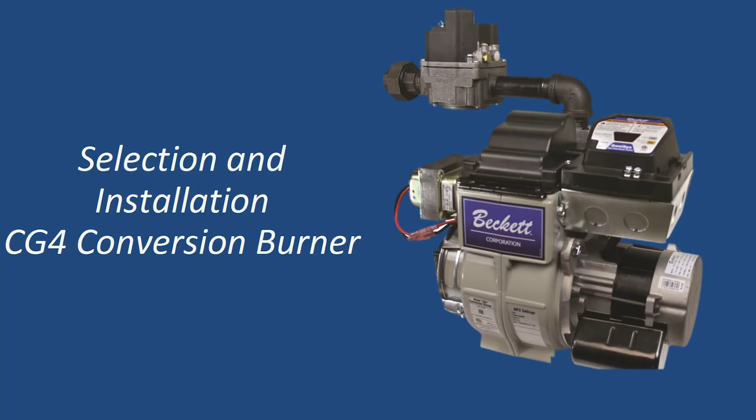In this video, you will learn how to select, assemble, and set up a Beckett CG4 gas conversion burner. This video does not replace the installation manual that comes with the burner. Please read the manual and pay special attention to the warnings and cautions included in the manual.

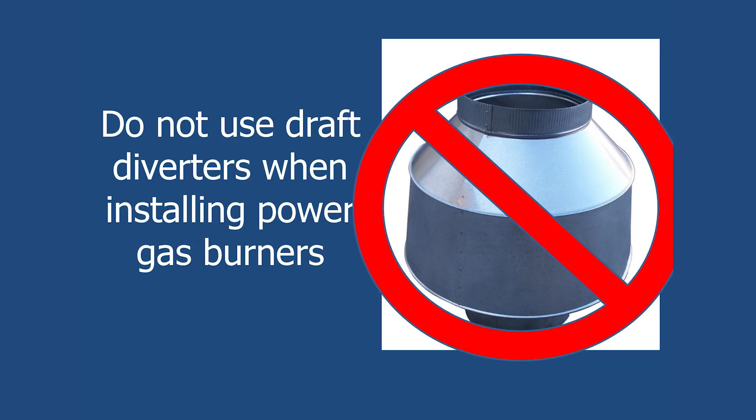Carbon monoxide poisoning is a real danger when installing gas equipment. Always obey national and local codes for venting combustion gases safely. Always use a double-acting draft regulator and block vent switch when installing power gas burners, as shown in this photo. Never use draft diverters when installing power gas burners.

Before selecting and assembling the CG4 burner, you will need to refer to the CG4 appliance guide to select the correct burner and air tube combination. The CG4 appliance guide can be located on the CG4 page of our website. Go to beckettcorp.com, click on Products, click on Residential Burners, click on CG4.

You will also need to refer to the CG4 appliance guide when assembling the burner to select the correct orifice, low fire rate baffle, air settings, and air band. Following the CG4 appliance guide should provide a trouble-free startup and make fine-tuning with your combustion analyzer simpler.

Beckett's Guide to Power Gas Burners is also available on the CG4 page of our website in PDF form. This guide will help you to size piping correctly and shows all parameters for installing power gas burners.

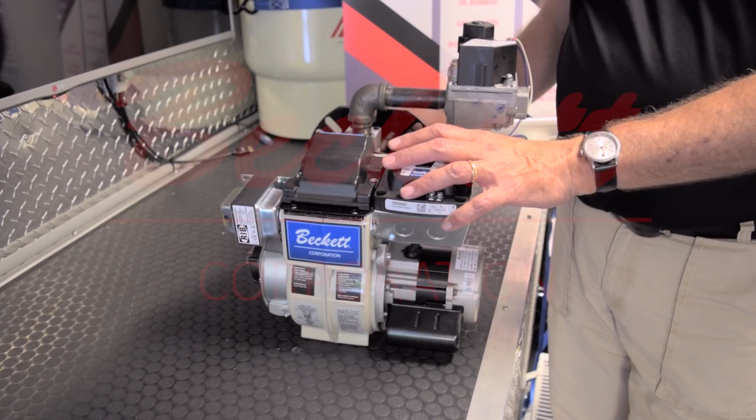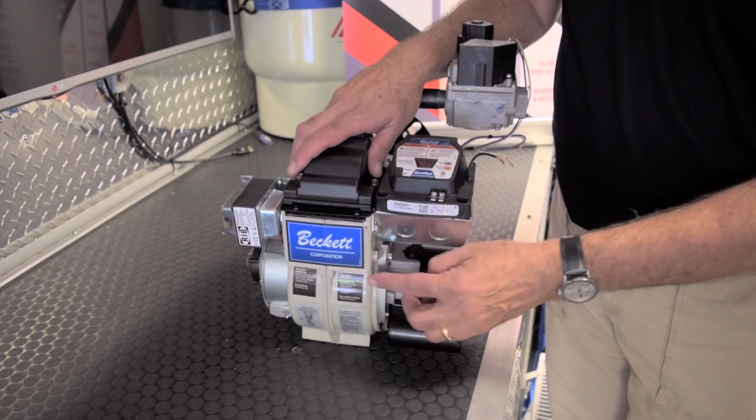I'm Jim Todd from R.W. Beckett, and this is Beckett's newest conversion gas burner for residential applications. This is the CG4. The CG4 looks familiar to you if you've ever worked on any of our oil burners because it's built on an oil burner chassis. This is the AFG chassis, AFG motor. There's an AFG fan inside, and we actually use an F head that you're all familiar with.

The burner is set up so that it is very simple for you to service and install. Part of that simplicity comes from flame rod rectification, direct spark ignition, a nozzle that delivers the gas into the air in front of the head so that you have a nice complete mix. There is also an Inconel shroud around the head itself to improve combustion for you.

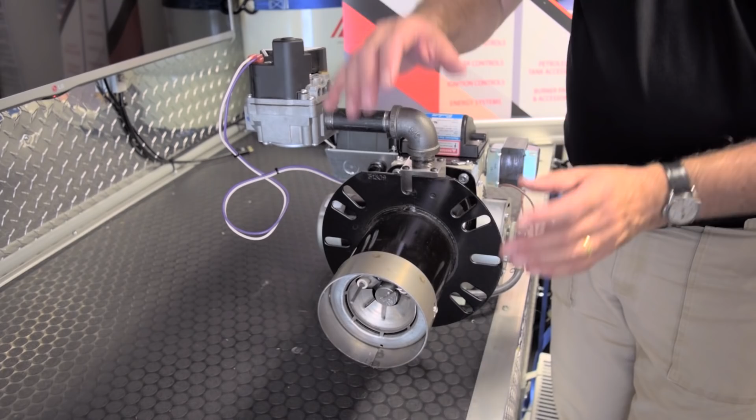The burner is sold with a welded flange for the appropriate appliance that you are going to install it to. You will refer to our installation manual for setup and troubleshooting. However, to pick out your parts, you will go to our website and look at our approved appliance list and get the air tube that is appropriate for your appliance.

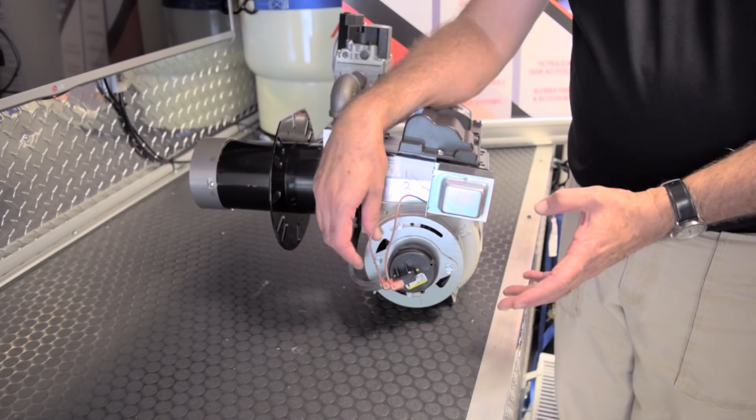The burner is shipped complete with an air proving switch that proves the air going in and the air going out to make certain that the fan is turning properly and that we don't have a blocked combustion air. If you run into a situation where you want to have direct combustion air, you can look at some of the oil accessories available from Field or other manufacturers that will fit right on the AFG.

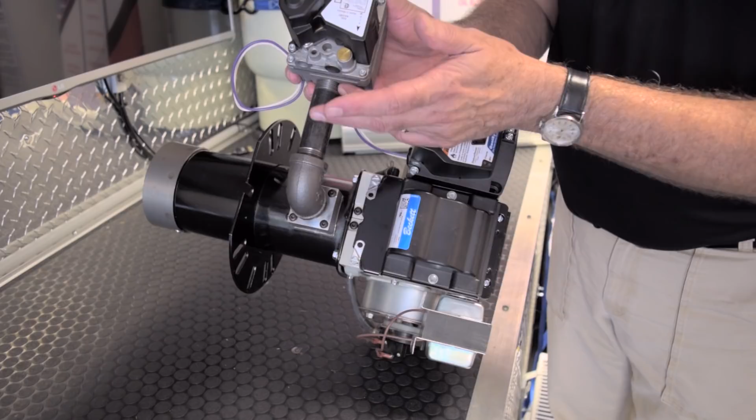The 24-volt transformer that you see here is a post-mounted transformer that is only there to provide 24 volts for the gas valve. If the transformer should go, it is an easy transformer for you to find at any supply house. Same holds true with our gas valve. The gas valve that we're using is from White Rodgers. It is 24 volts, is very simple to install, and if you need to replace it, you'll find most wholesalers around will have that available to you.

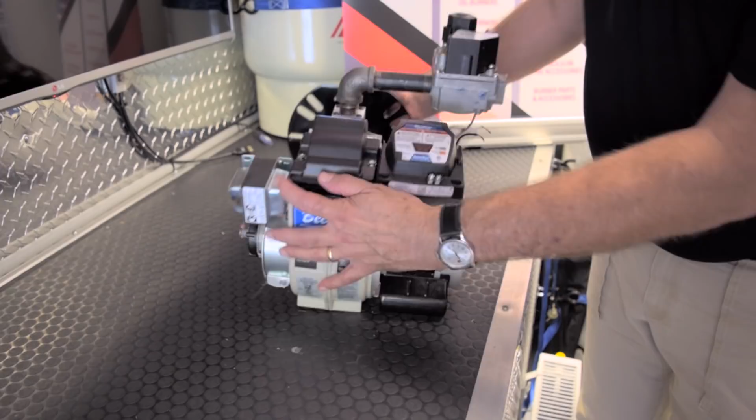The burner itself has a single pole direct current igniter on it that is manufactured by Beckett, and also the Beckett GeniSys for gas. This is the 7590. The 7590 will do all of the troubleshooting that you need just with the 3 LEDs that are on it.

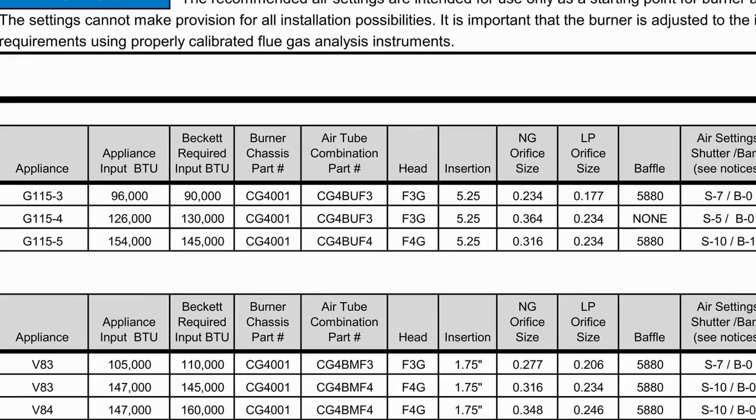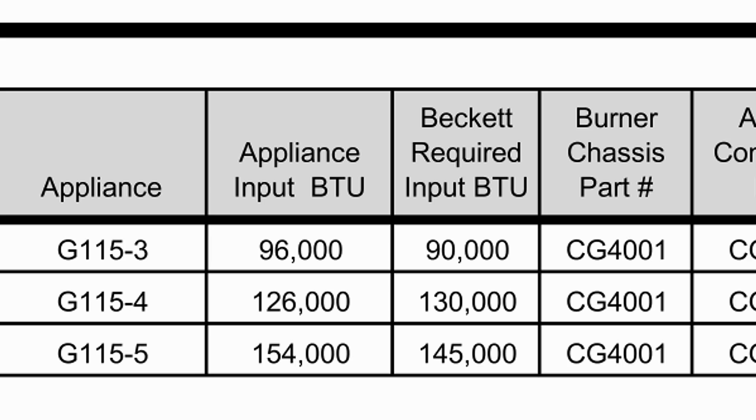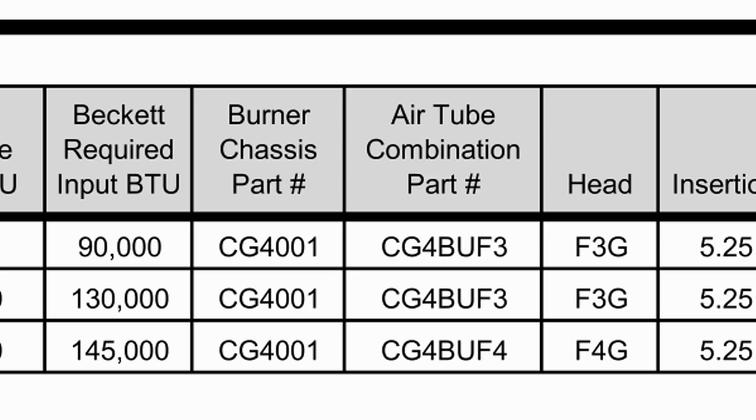Okay, folks. So we've looked up our boiler. The boiler we're working on today is going to be fired on propane. It is a G115/3. We've gone to the Beckett website, to the approved appliance list, and we are looking up a G115. Chassis is a CG4 001. The air tube combination is CG4 BUF3, which has an F3G head on it.

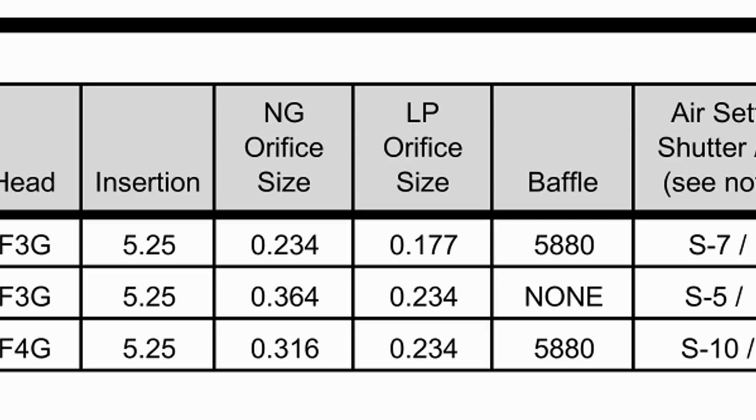So the orifice that we're going to use today is for an LP application, which is a 0.177 orifice, which will be found in the bag. The bag will have both natural gas and LP orifices in it. We do not have to respring the gas valve. We just have to change the orifice.

The burner and air tube boxes have arrived from the distributor. Let's open them to see what is provided. So now we'll uncrate the burner chassis box, and then I'll uncrate the air tube assembly.

When you open up the burner chassis box, the first thing that you will find is a package with the instructions in it. In the instructions, you will also find the hang tags for service that we will reference afterwards, and all of the instructions that we need for the control, serviceman's information on the pieces and parts, labels so that we can relabel the boiler indicating what's going on for propane.

This is the hang tag, and the I&O manual. In the back of the I&O manual is a startup sheet that we will refer to later on, but this sheet must be completed when you're doing your conversion.

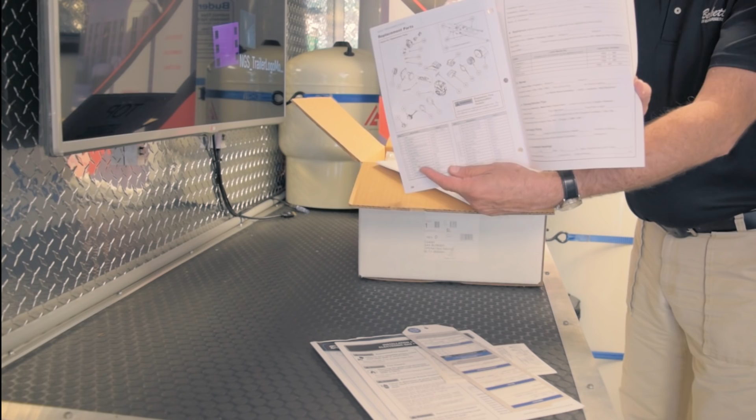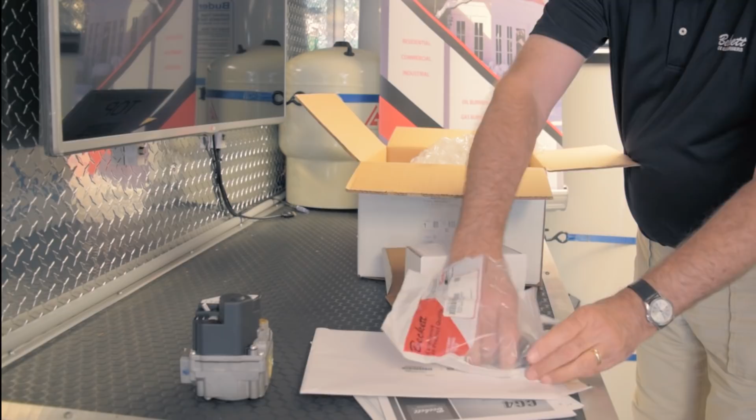The other components in the box are the White Rodgers 24-volt gas valve, a low fire baffle, and some fittings, including a union and a T with a test port in it so that we can test the incoming gas pressure.

And you'll put that into your line. And here's your union so you can break it apart for service. And the low fire baffle, which we are going to use on this application. Then we have the chassis.

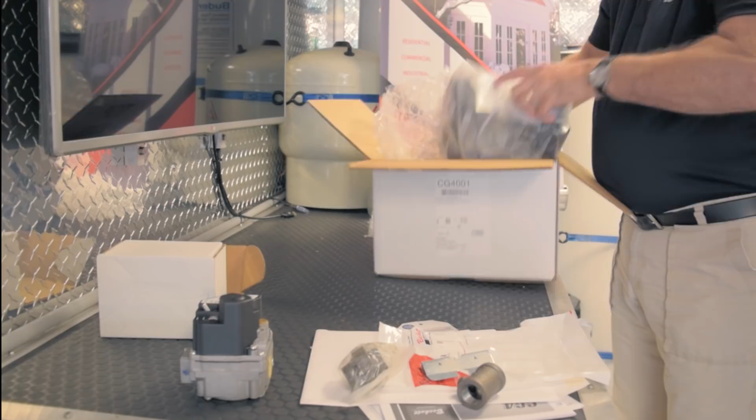The chassis is complete with a 24-volt transformer to power the gas valve, my ignition module, my igniter, which is 32,000 volts direct current, single pole, and my GeniSys 7590 control. The wires that you see here are for your gas valve. White is your common, purple is going to go to your main valve.

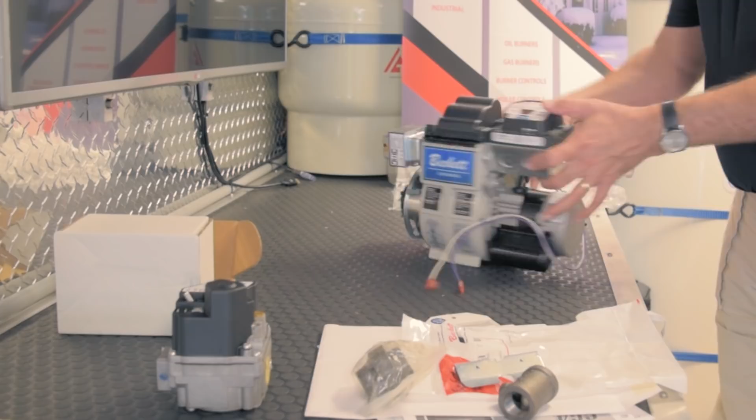The other components on the burner itself are the air proving switch, which tests air coming in and checks for air going out so that we are certain of that. Okay, now we're going to open up the air tube assembly. The air tube assembly is going to have some more components in it as well as the air tube assembly itself.

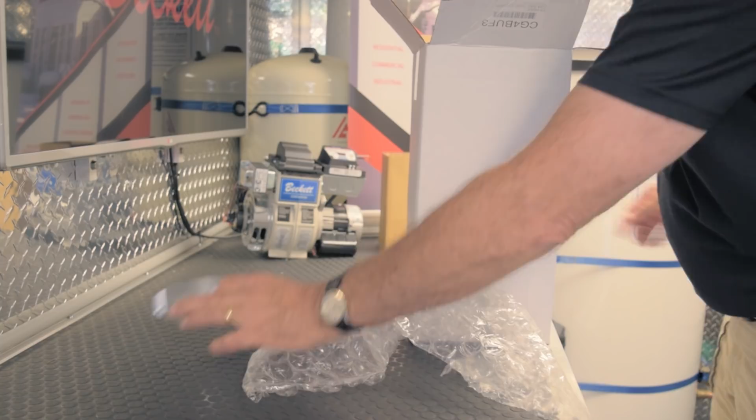Part of this assembly is we're going with a lower firing rate, so we need to use a blank band on the burner itself. This is the blank band. We will install that later on. The other box that you'll find in here as we go along is the box that has got the connection for the gas train assembly.

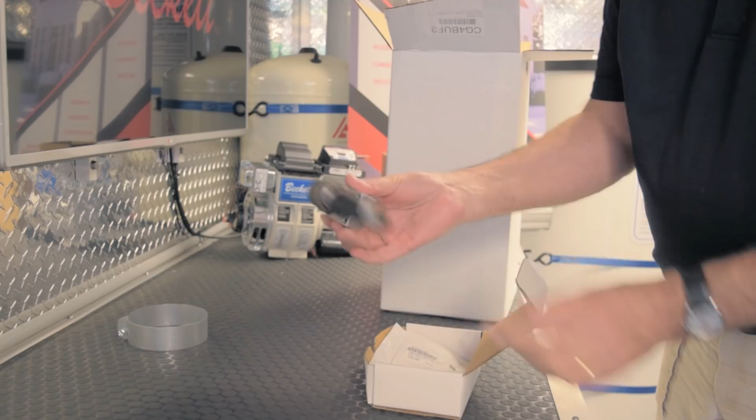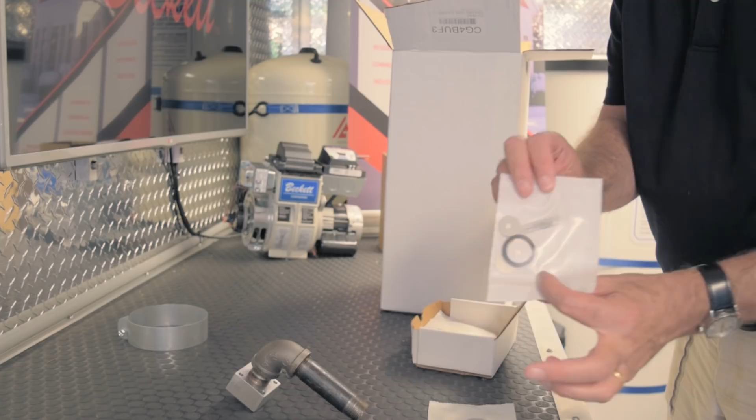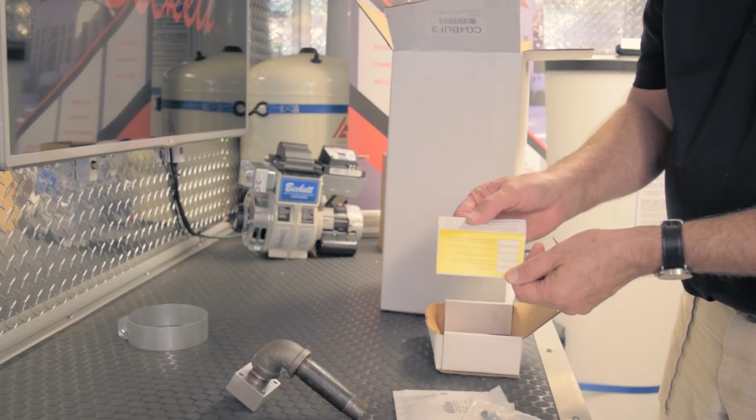Here is our block. That's going to go on the gas train assembly. We have our natural gas orifice pack. We have our LP gas orifice pack. And then we have the small screws that we're going to use to put the burner together. Additionally, there are instructions and another label so that we can label the boiler accordingly.

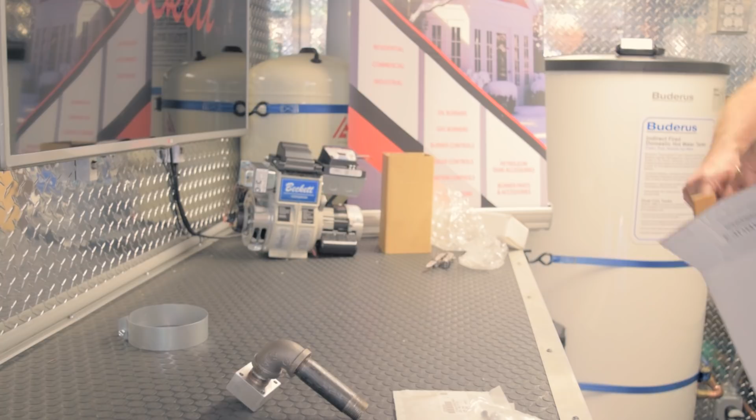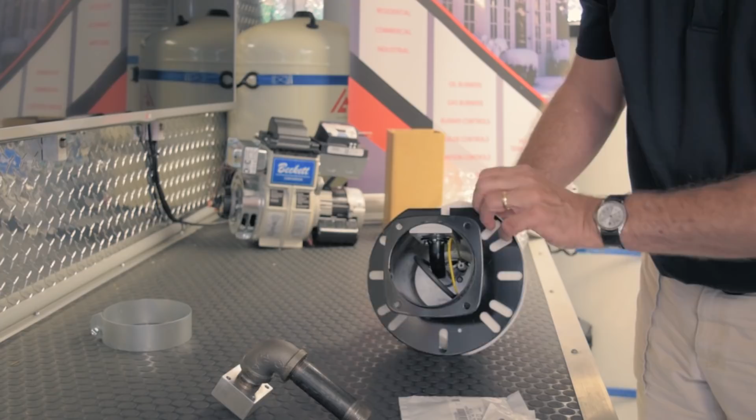Then we'll pull the burner air tube assembly out. The air tube assembly is set up with the appropriate insertion depth for this boiler. We have two flanges on this: this flange that will go to the appliance, and this flange here that will connect to the burner itself.

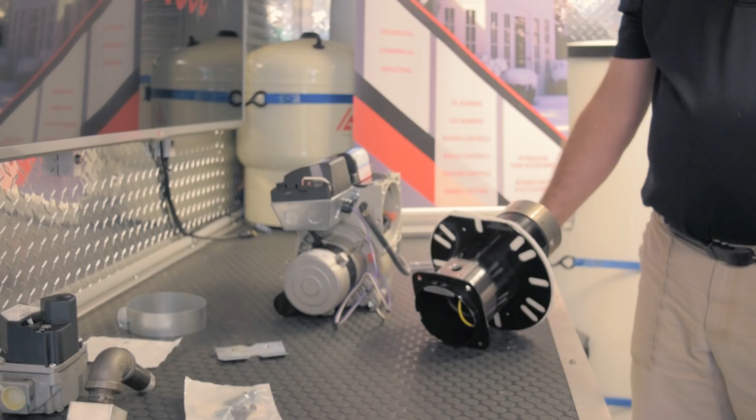The burner now is ready to be assembled. Make sure you have the following tools available. You will need an 1/8 inch long shaft Allen wrench, 5/16 and 1/4 inch nut drivers, and a 3/8 inch box wrench or socket. So our first step in mounting the air tube assembly to the chassis is to remove these 2 screws right here.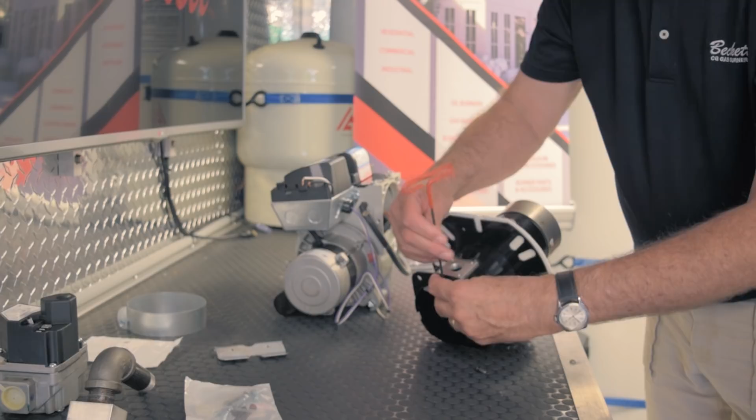There are 4 screws that hold the gasket assembly in place. If you ever need to pull the gasket assembly out, you can take those 4 screws, remove them, and the gasket assembly will pull right through the igniter area itself. So now I will place this in against the chassis. I'm going to put those 2 screws back on. They're going to drop down into the top.

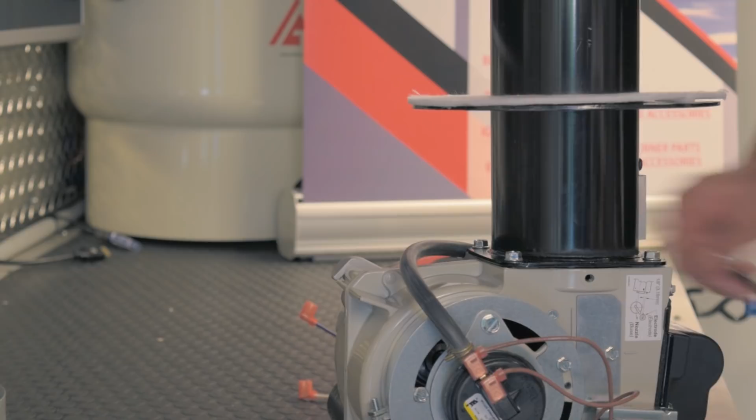I'm tightening this up. I'm not going to tighten them up completely until I get the rest of the screws in place. This packet has my 4 screws that will go into the chassis from the front through the flange, and 2 1/4 inch screws that are going to go into the chassis on the side. So I'll take and put these 4 screws in. And now there's 2 1/4 inch that go on either side.

Now what we will do is we will open up the igniter by loosening up these 2 clamp screws, flipping the igniter back. The low fire baffle is installed on this wiring trough right here. So what I will do is install the low fire baffle in this fashion, and then I will make certain that it is all the way down.

Okay, so now what we want to do is we want to wire the igniter so that we have ignition, and we want to wire the flame rod. This is the wire from the control to the flame rod, which is the yellow wire. Take our quick connect, put it together. When we get finished, we want to make certain that it's in this trough right here so that we don't pinch it.

I'm going to take my ignition cable, and as I close the igniter, I'm going to put the single pole igniter cable on, close my clips, and tighten them back down. And now I don't have to get into the burner anymore.

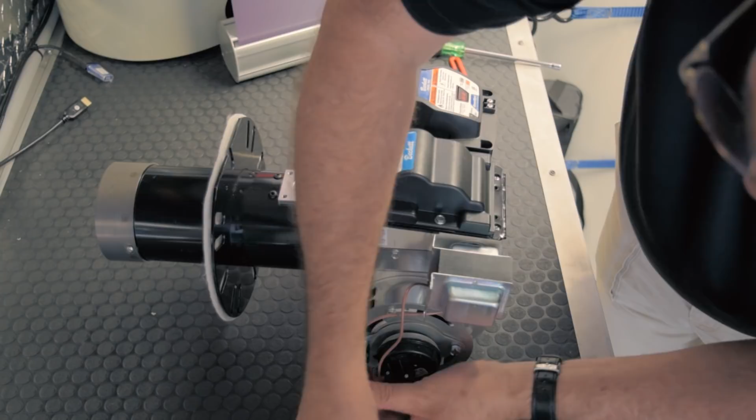Now this particular application requires the solid band as opposed to the slotted band that's on this now. To do that, we're going to have to remove the air proving switch so that we can get the band off. Easily done. 2 screws that we will remove, and even if we didn't have to remove it, we would want to loosen these screws before we do our adjustments. If we don't, they will hold the shutter in place and we will not be able to turn the shutter.

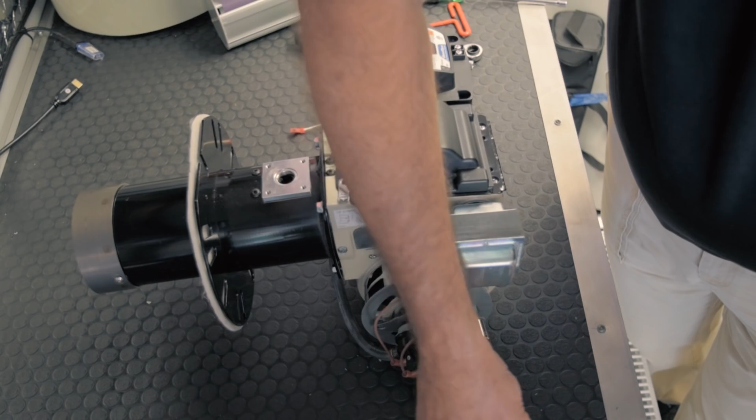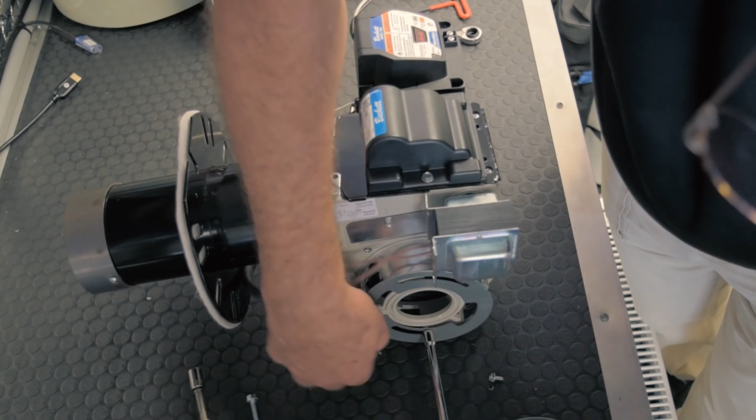So I'll take the air proving switch off, 2 3/8 inch nuts. Then what I'll do is take my 5/16 nut driver, remove these 2 screws, and this screw here. And the shutter comes off. Then I will take and loosen up the band.

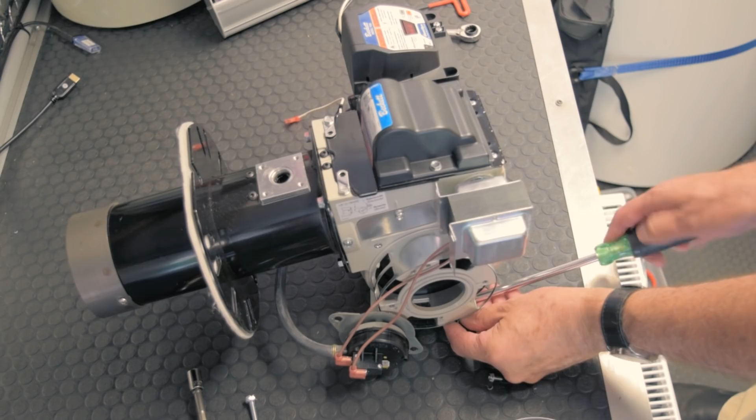The band will slide off, and I will slide the blank band on. Once the blank band is in position, I will tighten the blank band, making certain it's against the chassis. And then I'll put my shutter back on. The shutter again has the 2 screws that we removed. I'm not going to tighten them up all the way because I'm going to have to adjust it.

Then I will reinstall my air proving switch, which, if you look, goes right in the same holes as a pump on an AF or an AFG. And the reason for that is we are working with an AFG chassis. And I'll tighten those screws up at the end when I'm finished adjusting my burner.

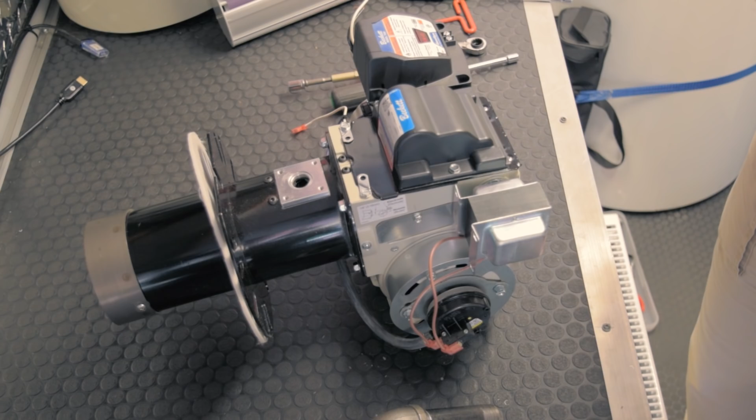Now we can install our gas valve. I'm not going to grease or use dope right now because we're doing just a demonstration for you. But we have an outlet and an inlet. This is the inlet. This is the outlet. There is an arrow on the top that indicates flow. My gas train is going to come into the inlet, and I'm going to put this assembly after putting the proper pipe dope on it.

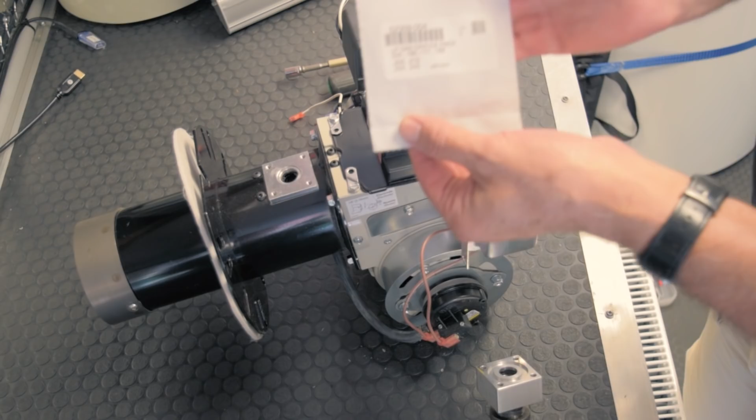And now what I will do is, before I go any further, I'll take my LP pack, open it up. Inside I've got my orifices and my grease for the O-ring. My orifices are marked, and I will look for a 177, as we talked about earlier, because this is going to be propane. 177.

Now I will take my grease, break it open, take my grease and run my grease inside the broached slot. Very important step. We have to make this gas tight. I will drop the O-ring in place, and then I will grease the top of it.

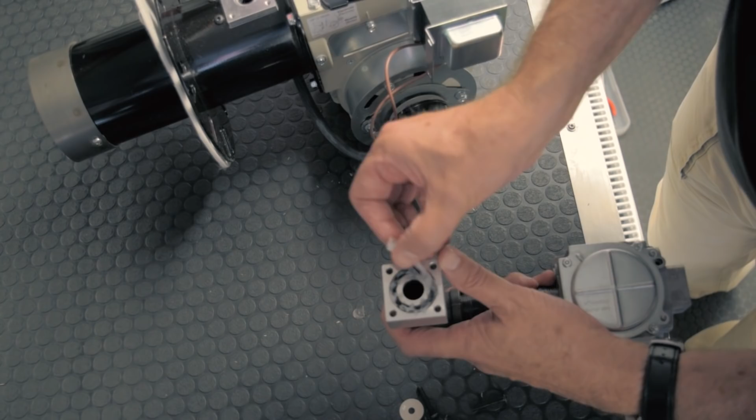If you would like to install the gas valve with everything in place, you can. However, if the entry is going to be from the right-hand side, which it is this time, you will not be able to turn the gas valve by the control. You have your choice of left or right entry.

Now I will place my orifice right in here. That's it. If I need to change my rate, I can take this assembly off and change my orifice. There's no drilling at all, so I'll keep those orifices. I will put my screws in. And now I have assembled the burner.

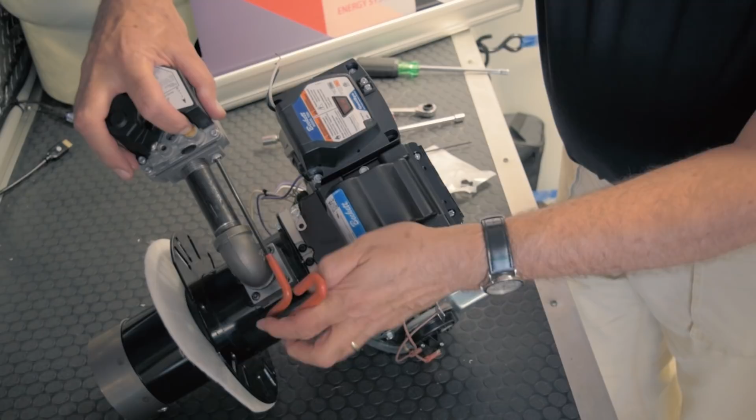The only thing that I am going to do before I start to install this is I am going to remove an outlet pressure tapping screw so that it's easier in the long run. It's right here. That's where I'm going to check for my 3.5 inches of water column. I will adjust that using this screw right on the top here. Tighten it down if it's too low, loosen it up if it's too high.

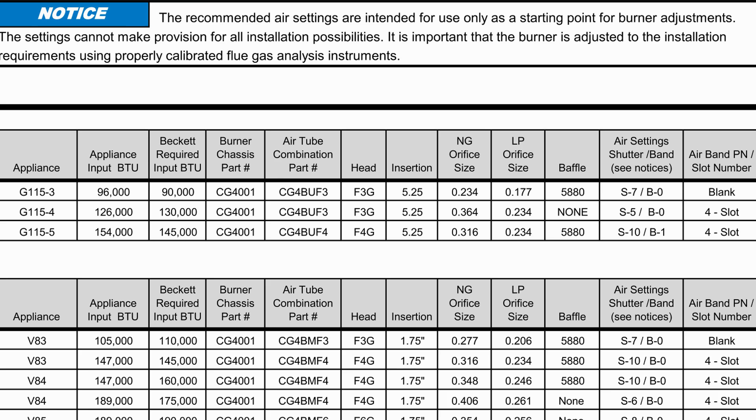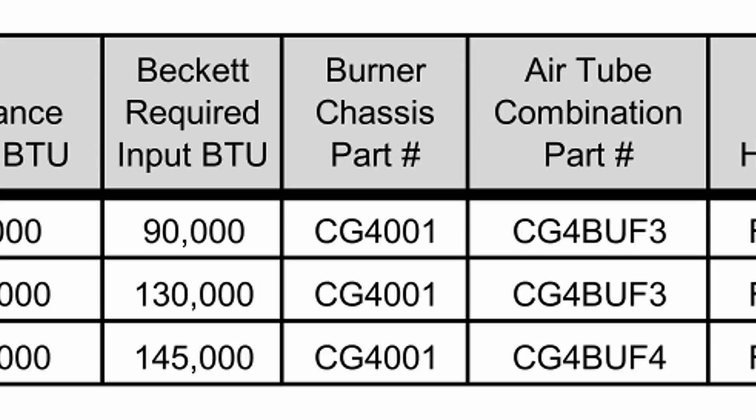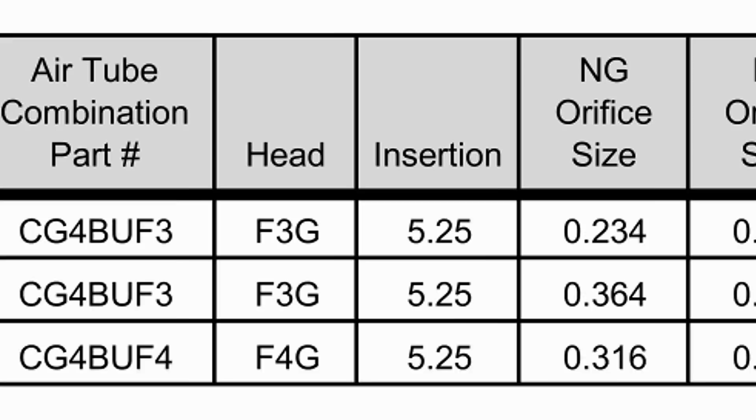Now is the time to check to see that you did everything correctly. We have a G115-3 boiler. We're firing at 90,000 BTUs. The burner we got is a Beckett CG4001. The air tube is a CG4 BUF3, which has an F3G head and a welded insertion of 5¼ inches.

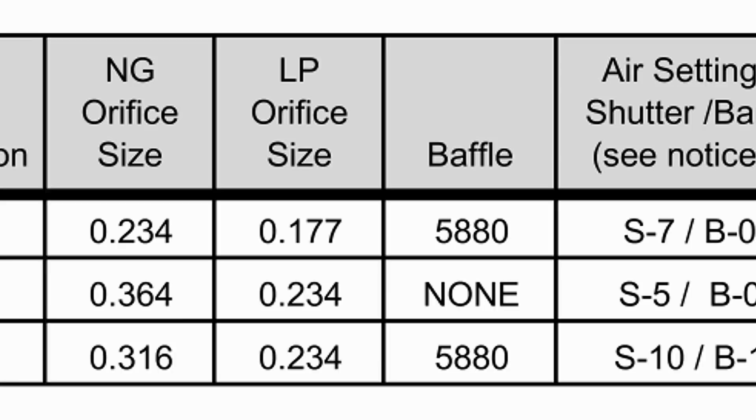We are firing with LP gas, so we use a 0.177 orifice, and we installed a low fire rate baffle according to the appliance guide. The next thing to do is to set up the air shutter and the air band. The shutter is on number 7, the band is 0. We already installed a blank air band, so that would always be 0.

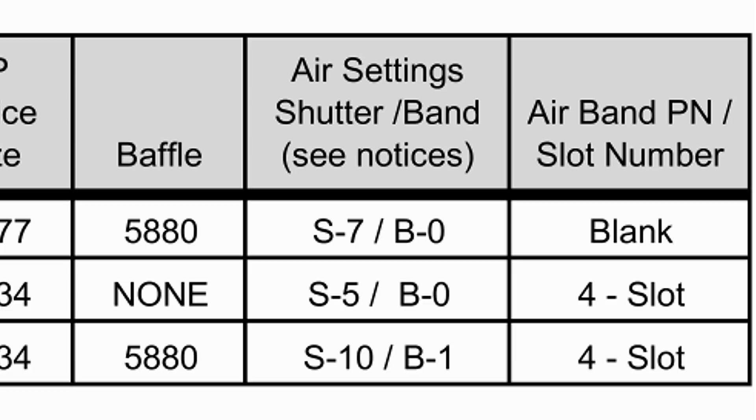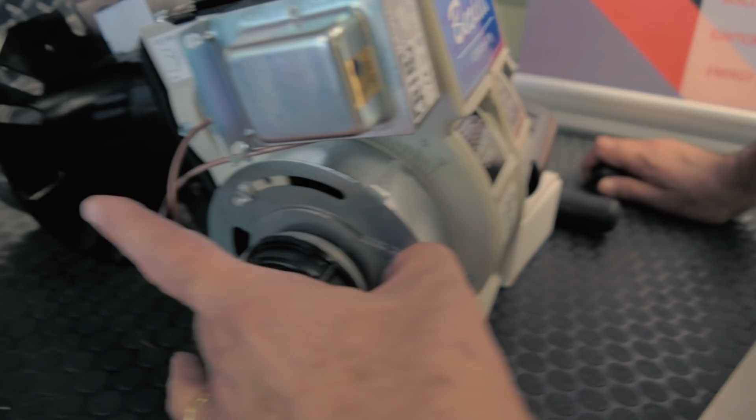The shutter settings are right in here from 10, 8, 6. I'm going to go to 7, and I'm going to tighten up these two screws slightly, not completely. And once I get finished, I will tighten both of them up, and I will tighten up these two 3/8 inch screws. Then I will go to my gas valve assembly, and what I'm going to do is

wire my gas valve with the white wire to the common post, which is right here. And I'm going to do it like this so I can get at that switch. And my purple wire will go to my main valve, my main power. And I get those two flag terminals on there. There is an on-off switch to help you guys when you're working with it.

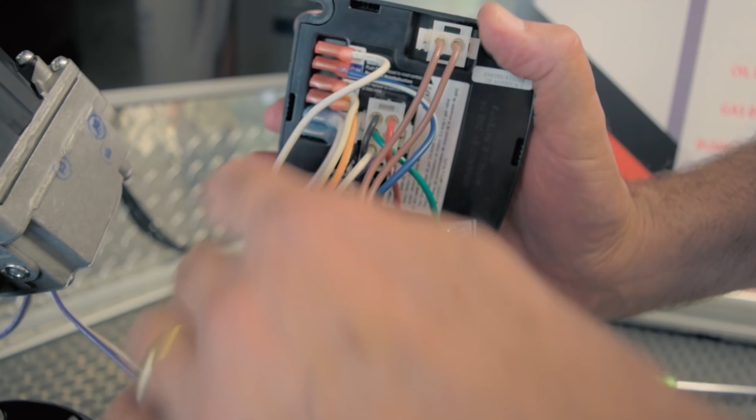The other thing that I want to show you is the Beckett control, the 7590, is pre-wired with two wires coming out for power that you will take a knockout, pick up your power from your boiler control. This is the air proving switch. This Molex here is for my gas valve.

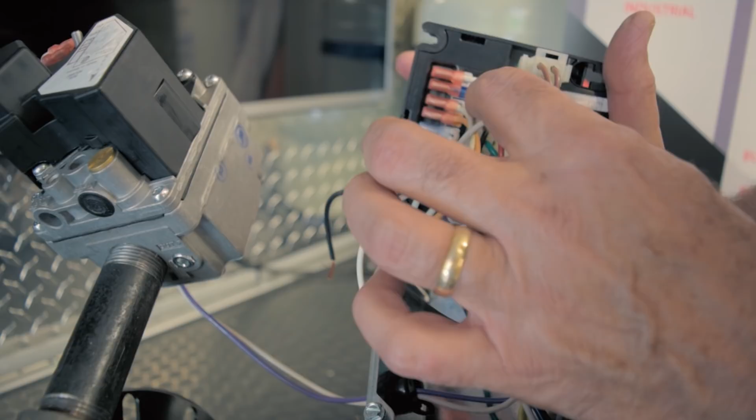And here's my wiring, just like an oil burner, for motor and my ignition. Orange for the motor, blue and white for the igniter, and my black and white coming in, and the neutrals accordingly. You will notice that there is nothing on TT right now. On some applications, I will bring the spill switch into TT. On today's application, we are going to wire the spill switch into the boiler control. So we have to jump TT to make this work. But there has to be a spill switch installed in our dual acting barometric damper.

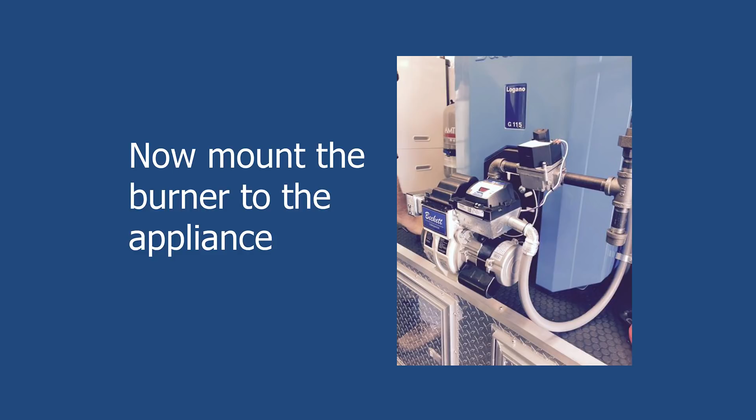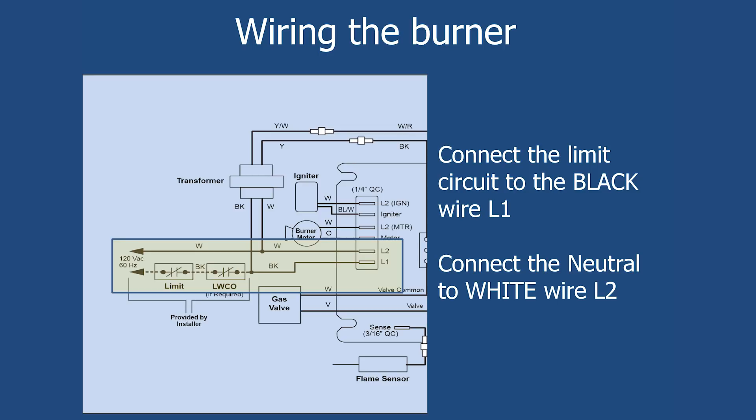The burner is now assembled. You can mount it to the boiler in the same fashion that the oil burner was mounted. Wiring the burner. Connect the wire from the limit circuit to the black wire connected to terminal L1. Connect the neutral wire to the white wire connected to terminal L2. Typically, the blocked vent switch should be wired on the TT terminals on the 7590 GeniSys control. Our demonstration burner is in a training trailer and is wired differently.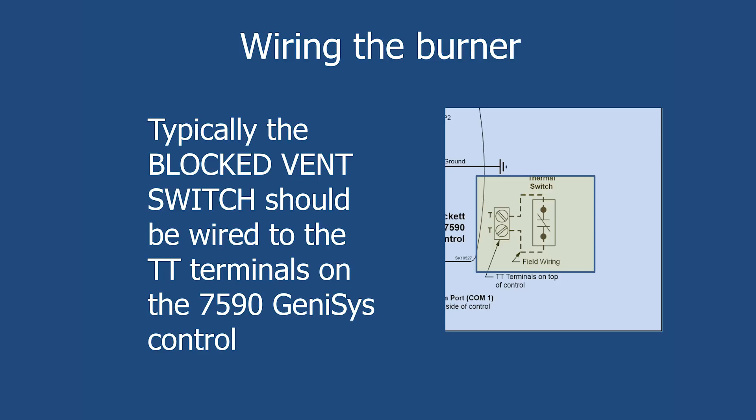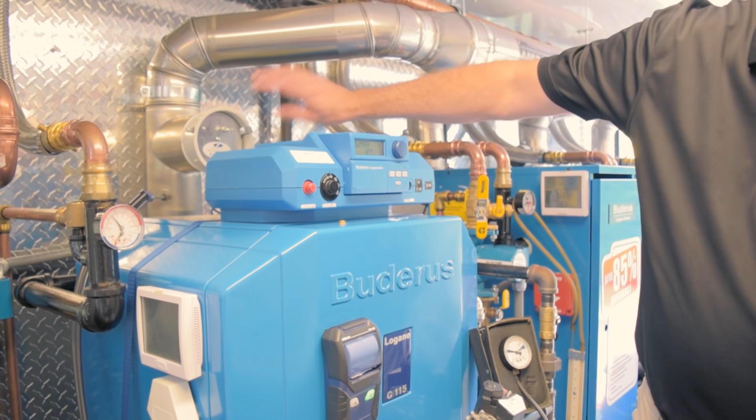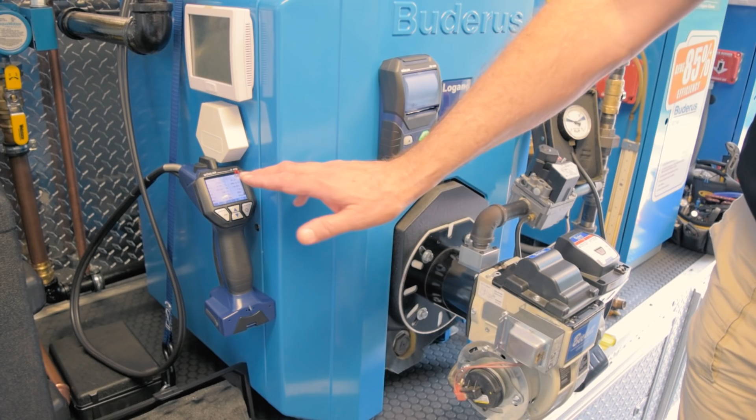So what we've done now is we have cleaned our boiler, we have made our modifications to the draft regulator so that we have a dual acting draft regulator with a spill switch on it. The spill switch is connected into the boiler control itself. The burner is running. We have our analyzer in, and the important part about having the analyzer in right now is we want to make certain that we keep that CO within acceptable ranges while we're making our adjustments.

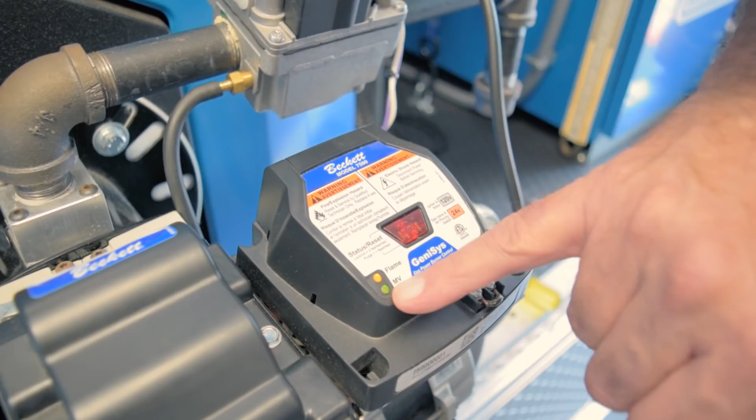So now we're going to check our gas pressure, and we'll see that we're running about 3.5 inches of gas pressure. This is connected to the outlet of the gas valve. That's the advantage of that gas valve. If you look at the GeniSys control, the yellow flame is on solid. That means that I have a good flame signal. The green light is on, telling me that the gas valve is energized, and the red light is on solid, telling me that I'm in a cycle with the burner running.

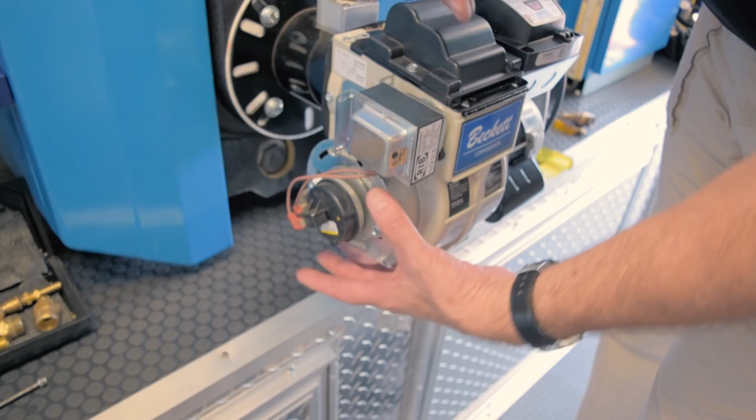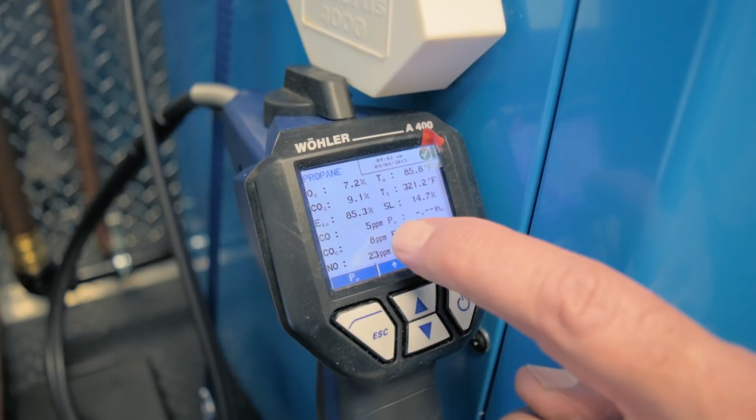I have adjusted my air by moving my shutter to my appropriate setting, and now if you come over here, you can see that the analyzer is showing an 85.3% efficiency. I've got a stack temperature of 320 degrees and climbing. My CO is 5 parts per million. My CO air free is 8 parts per million. My oxides of nitrogen are 24 parts. My O2 is 7.2% oxygen. Very good settings for this application.

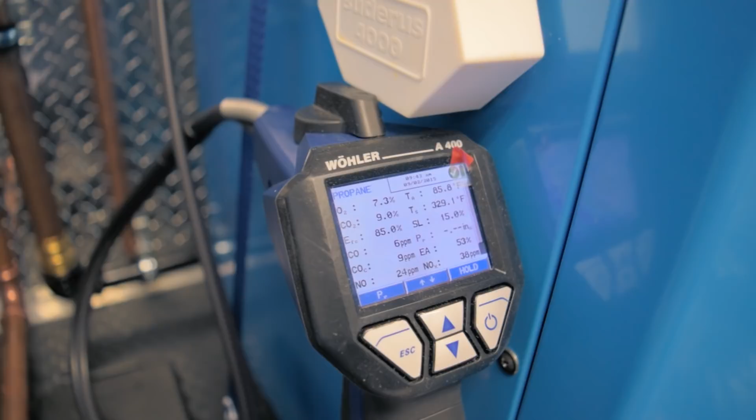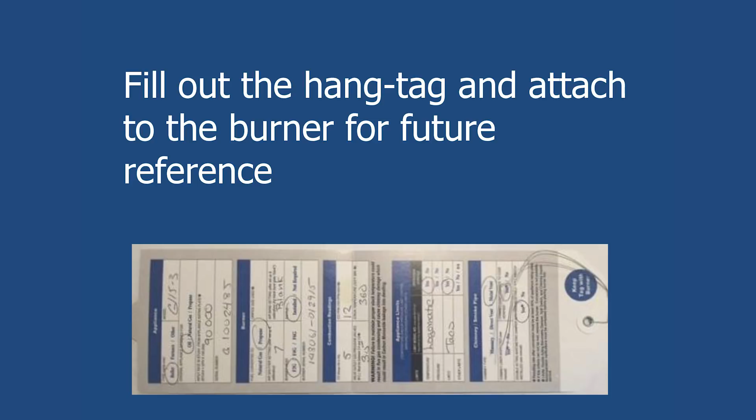We could tune it up a little tighter depending on your customer's installation. This installation is running essentially direct vent. It's running right out to a stack on the side, so I'm not going to try to get it any tighter than we have. Now, it is very important that you take your combustion analyzer and record your readings. Completely fill out the hang tag and attach to the burner for future reference.

Thank you for watching our video. Following this video and referring to the appliance guide should give you a successful installation.